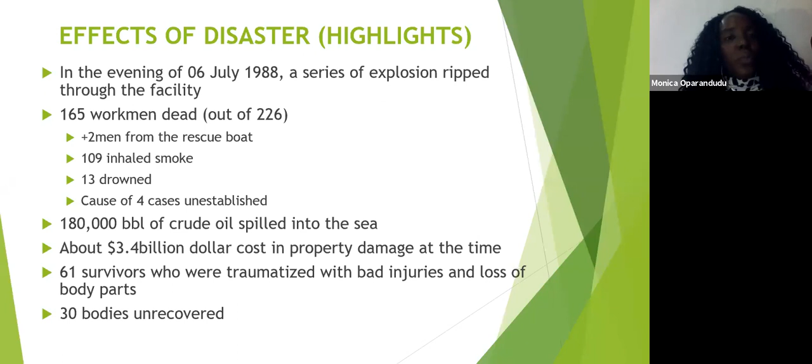Piper was exploited in 1973, and the platform, Piper Alpha, was constructed just about 2 years after. Occidental took up operation of Piper Alpha in 1976, producing oil and exporting to one of the islands in the Orkneys called Flotta. Because of the high productivity of this operation...

Just barely 2 years after production began, the platform requested from the UK government an exception to encroach further. This request was granted on one condition: rather than continue to flare, which was the practice, they would have to export gas.

In response to this condition, Occidental had to get Piper Alpha retrofitted to accommodate a gas treatment facility as well as a condensate handling facility. They principally exported propane and methane gases while injecting the condensate into the produced oil line for export.

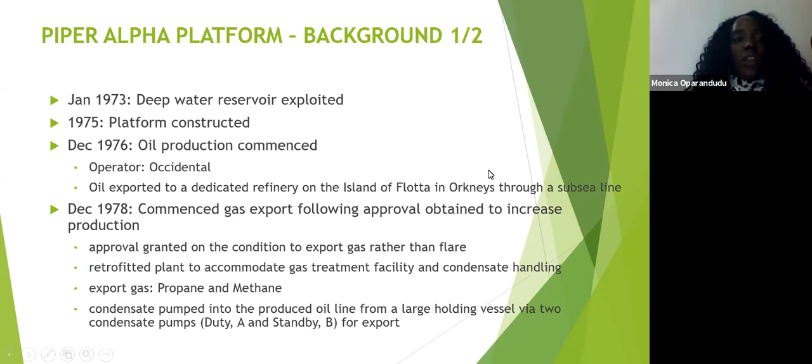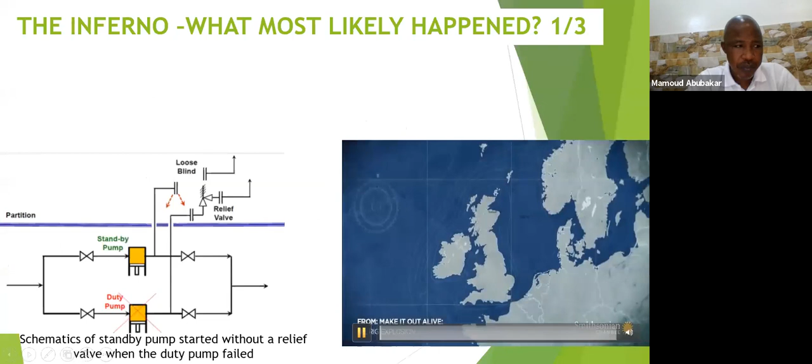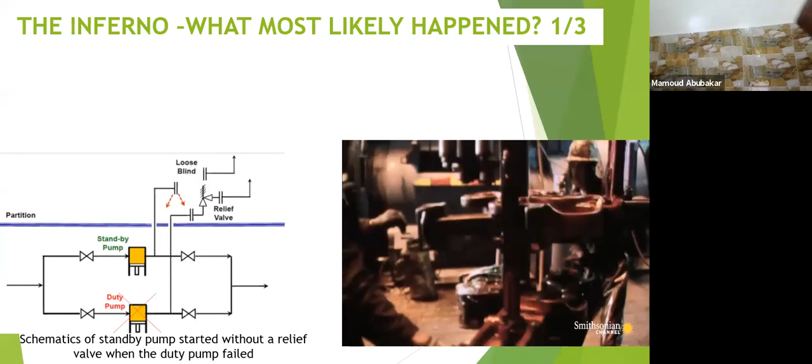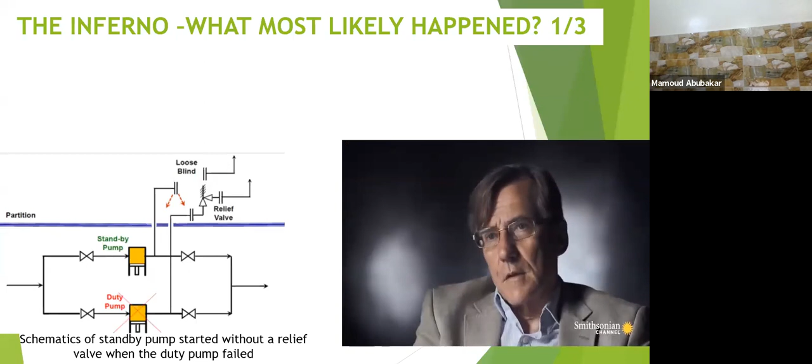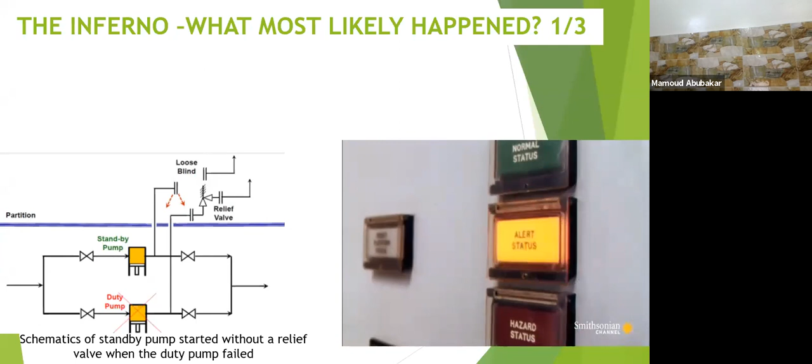July 6, 1988. 120 miles northeast of Scotland: the Piper Alpha oil rig. At 14,000 tons and 2.5 times the height of the Statue of Liberty, it is one of the largest rigs in the world. Piper Alpha was the world's most successful oil rig, meaning that in a single day it produced more barrels of oil than any other rig or platform. A crew of 226 rotated shifts to keep oil and gas flowing. Geoff Bollands is the chief control room operator that evening. At 9:45 p.m., Geoff suddenly hears an alarm indicating a problem with one of the rig's condensate pumps. Condensate injection pumps tripped more than any other equipment they had; there was no panic, they knew they needed to get it back on because it was going to start affecting production. That evening, Pump A is offline for maintenance, leaving just Pump B working—the same pump now shut down by the alarm's trip system. The condensate pumps were an integral part of the production facility; you couldn't have them both offline for any great length of time without shutting down everything. To avoid a full shutdown, a decision is made to halt maintenance on Pump A and bring it back online. But what nobody knows is that Pump A has a fatal flaw: during maintenance, its safety valve has been removed, meaning there is nothing to stop thousands of cubic feet of gas escaping into the atmosphere. The faulty pump is switched back on. Then, at 9:55 p.m., disaster: a spark suddenly ignites the escaping gas, and an explosion rips through the rig.

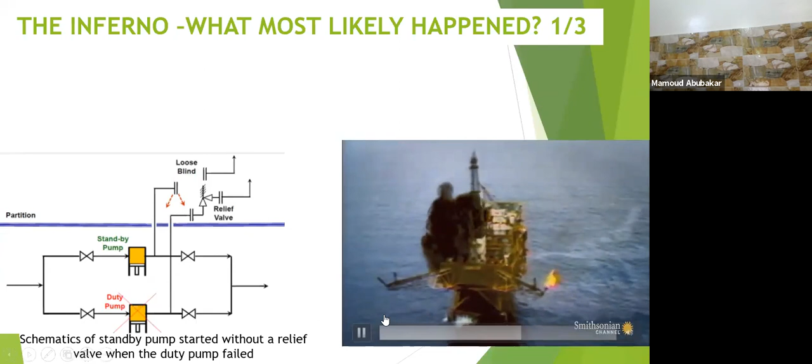Confronted by 700-degree flames, most of the 226-strong crew are now either dead or severely injured.

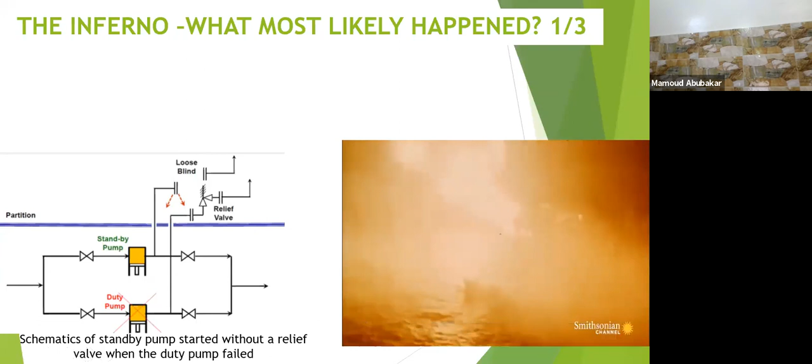The nearest analogy is that it was... Okay, so as a way of refresher, and for the benefit of people on the call who are not so familiar with the Piper Alpha story.

The release of hydrocarbon came from the flange, which was used to stop the point from which the pressure relief valve was taken off. What was said to have happened that day, from the investigation, was that after the spade had been put in between the line flange, the maintenance folk had actually tightened the bolts with their hands.

Secondly, the line also was not—and for understandable reasons—the line was actually isolated; the line was offline.

One other key thing to note about what happened that day was that, as expected, the permit to work on the standby pump was raised, separate and different from the pressure relief valve of the pump.

The issue was that the filing system at the time was such that permit to work files were put in locations where the equipment was actually stored, next to the equipment being fixed or for which they were raised. Essentially, they had a location-based filing system that warranted permits to work being kept in different locations rather than together for sets of equipment.

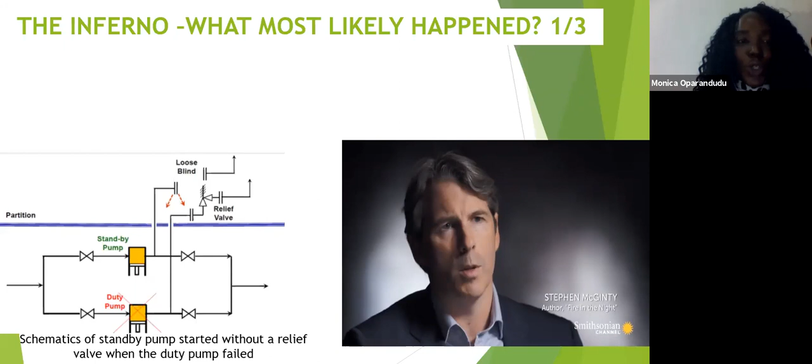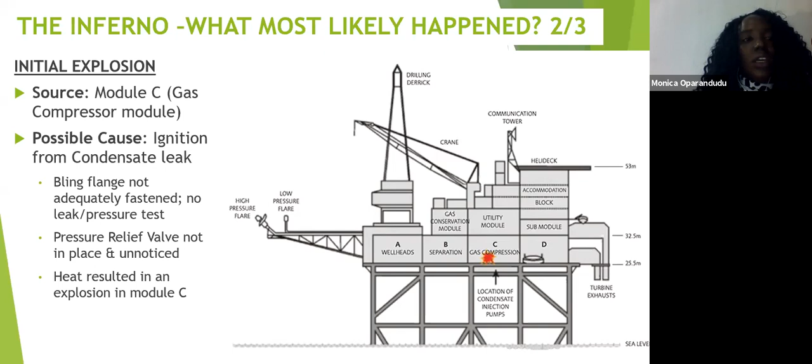The first explosion happened as a result of an ignition in module C, which is a gas compressor module. Yet another explosion followed shortly after in module B.

What was thought to have happened in this case was that after the system upgrade from oil production to accommodate gas, there was no risk assessment done to revisit the effect of gas production on the facility. The compressor module was designed to withstand only fire, not blast, so when the first explosion happened, the walls of compressor module C were shattered apart, with panels flying around.

It was thought that these flying panels would have ruptured a tank in module B, which is actually the separation platform, housing a tank farm of up to 55 tons of crude oil.

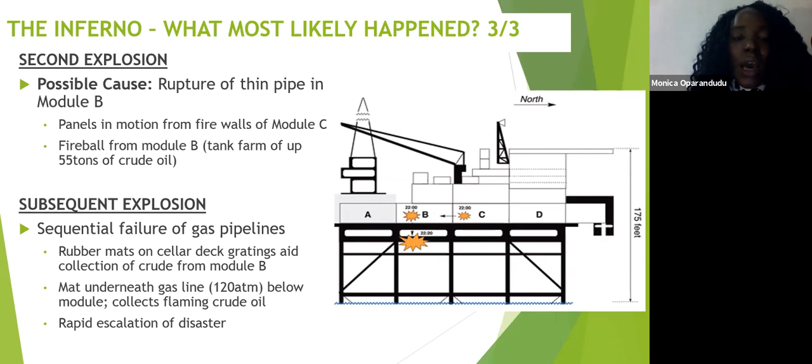After the second explosion, several other explosions followed, principally from the failure of a gas pipeline, which was pressurized up to 120 atmospheric pressure.

A couple of other findings that escalated the incident: the fire was still being fed from adjoining platforms, the Tartan and Claymore. This was principally because the management of those platforms were insistent on waiting for feedback on the severity of the incident on Piper Alpha—feedback that was never going to come, given what they were experiencing on the other end.

One other escalating factor was that in the course of about 2 hours of flame, no water was released into the fire to fight it or to cool the structures. That was a significant gap.

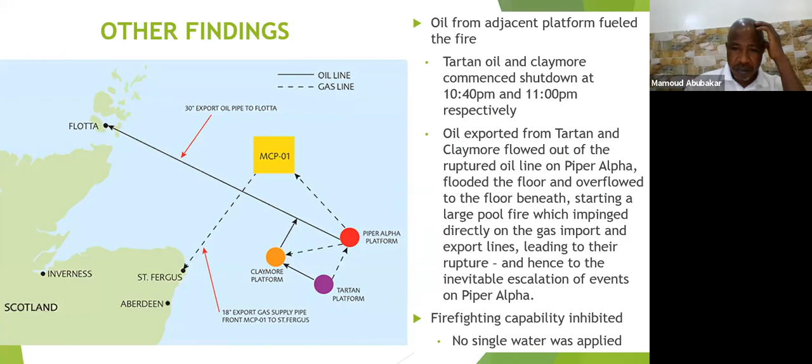Monica, you finish before we do question and discussions. Questions? Okay. All right. Okay, that's fine. We'll move right into the incident investigation, just a snapshot.

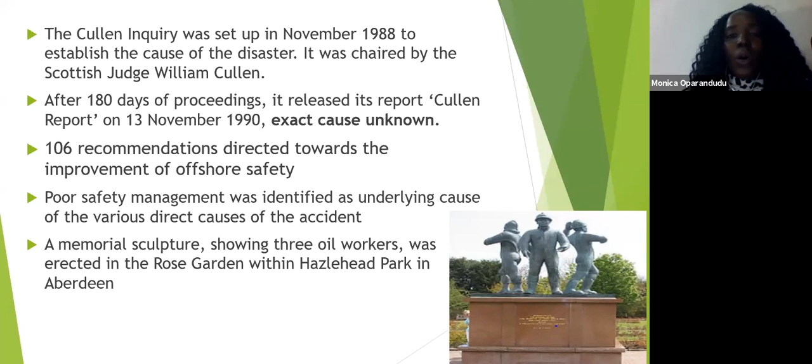After the incident, a panel of investigation was set up led by William Cullen, and it was deduced that there was no exact cause of the incident. Understandably so, because most of the evidences were lost and a lot of people who would have given live testimonies were also gone. However, piecing some information they got together, they were able to arrive at three major root causes: first being management failure, second being a gap in the MOC process, and finally, procedural failure.

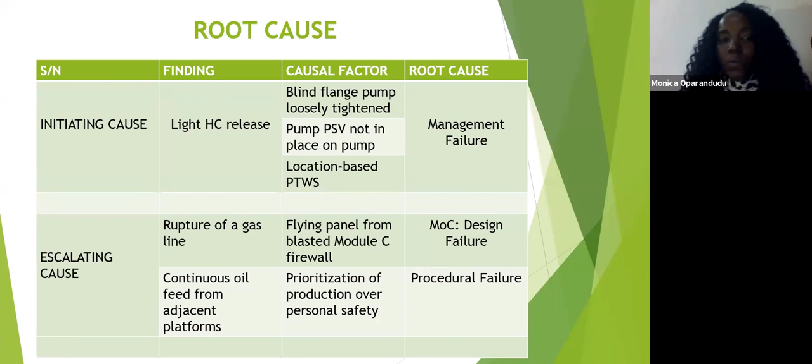As we all know, Piper Alpha, in terms of number of lives lost, had been the most fatal and traumatic event in the oil and gas industry, right? And the event left us with a lot of lessons. So right now, we'll just take a snapshot into the key lessons that were learned from the incident. One of them being that versus the

location-based work permit filing system at the time of Piper Alpha, most facilities right now operate a centralized work permit system, that allows permits to work for systems and their associated components to be filed in the same place, regardless of relative location in the design of the platform. Also, to ensure a seamless transfer of activities between shifts, most operations have also begun to adopt toolbox meetings to ensure that no detail is left untouched between shifts.

One other lesson is the need to prioritize safety over production, which was one of the gaps we saw, and to also eliminate the human influence in deciding when to back off production, when lives are being threatened, are made to factor in back pressure systems during the design of platforms.

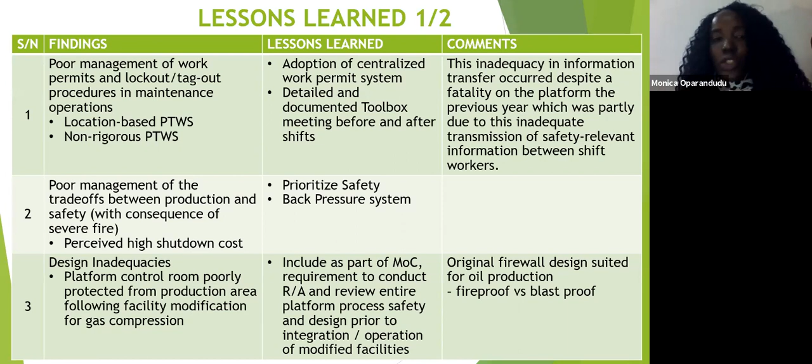Platform structures also gave way sooner than later in the course of the incident, right? Not able to carry critical components of the platform, especially the sections that housed the crew on board, the emergency room, right? So after this incident, there became a recommendation in one of the RPs that select platform structures be fire or blast proof, depending on the outcome for such platforms, and priorities are oftentimes given to manned platforms.

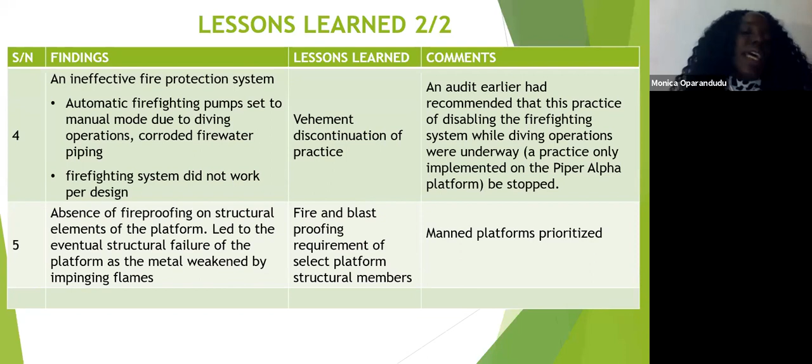Now to the legacies which Piper Alpha actually left us. The first and most important one, which was taken from the Piper Alpha incident, was the introduction of the safety case regime, which essentially is a written demonstration of evidence and due diligence provided by operators in order to demonstrate that they have the ability to operate a facility safely and can control inherent hazards.

To drive this safety case regime in the UK at the time, regulations were made to ensure that the safety case regime is enforced. And such regulations transferred the responsibility for identification of major accident risk from the legislator and safety inspectorate to the operating company. And it also stipulated that operators must also prove that they have consulted with the workforce.

In this case, the people who are exposed to the risk, right? So they would have consulted with them to prepare such safety cases, and have made copies of the accepted document available to them. And then this safety case also was supposed to be reviewed and updated periodically by the operators.

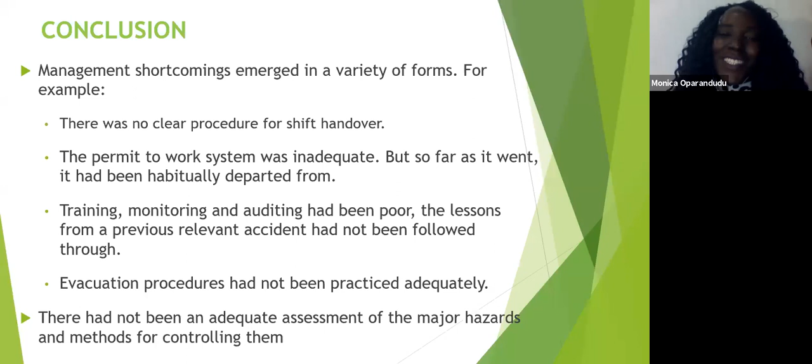And also as corporate bodies, it's good to know that we have folk from the assessment body joining us, and like personal safety, health, safety, and environment is everyone's responsibility. I am committed to safe operation and safety wherever I go and find myself. And the question I'm going to ask to everyone on this, thank you.

Thank you very much, Monica, for the beautiful and highly educative presentation. Before I hand over back to you, our elder for today, Engineer Bayo, I would like us to take note that this presentation wouldn't have come at a better time than the situation we find ourselves in with respect to process safety in Nigeria today.

We are aware of the recent tanker explosions within the same week, one in Lagos, another one in Lokoja, claiming over 50 lives. And these are coming on the heels of another explosion that happened a few months ago on an offshore oil platform off the coast of Ondo State. And you see these incidents that happened 32 years ago have similarity with what is happening today. So what we should focus on discussing today is to look at those recommendations that were made after these incidents, because you learn from incidents and take actions to prevent further occurrences.

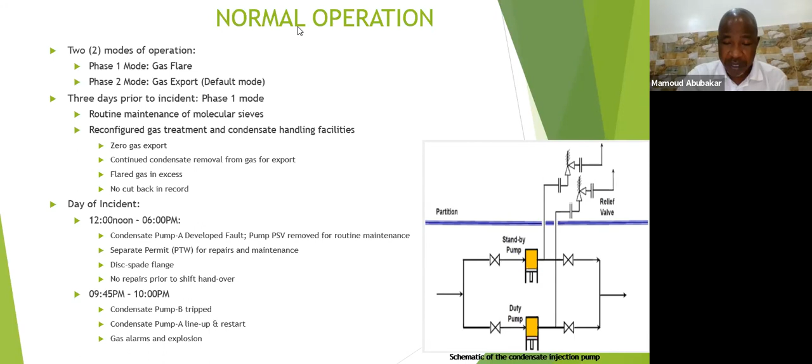So whether our situation is still the same as the situation where the UK was before this disaster, or we've moved away and some of those recommendations have been implemented. We need to discuss this today and see if there's anything we can take away from this to improve our own system. Thank you very much once again, Monica, for this wonderful presentation. Mr. President's Representative, Engineer Bayo Olarewaja Alo, please, you take the first shot.

Okay, thank you very much, Engineer Mamoud, for putting this together, and Engineer Monica, congratulations on your very clear and interesting presentation on the Piper Alpha disaster, which happened some 32 years ago. And personally, listening to you, I know that there are a lot of parallels for us here in Nigeria.

When the Piper Alpha thing happened, I was very active in the industry at the time and working for a multinational company, Shell, and many other IOCs took seriously the recommendations coming out of Lord Cullen's report and ensured that they were implemented in facilities. I can say that Shell in Nigeria did that, and I'm sure that most of these other IOCs probably did the same. The problem is, what have we done in our own local operators? I'm talking about the marginal field operators. I'm talking of NNPC refineries and the NNPC pipeline system. Every now and then, we have this mini Piper Alpha happening on the NNPC pipeline.

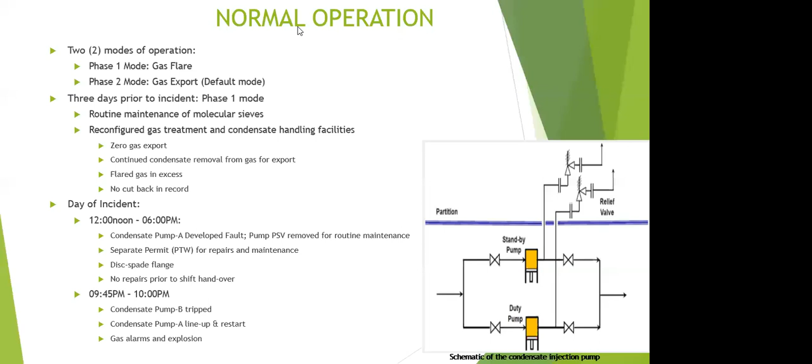Some due to failure of the aging facility, but a lot due to sabotage from people who want to steal the products. But what I find very, very distressing personally is the fact that after each incident, I don't see a published report that has looked at the incident, carried out proper investigation, knows what the failures are, what are the management failures, what are the technical failures, what are the operators' failures, and then put measures in place to address them so that we don't keep killing people around.

For me, that is an aspect that I think we should focus on. How do we ensure that those who are responsible in Nigeria perform their roles and come out with recommendations that will help us to prevent such occurrences again? If we don't do that, we will continue to kill innocent people and continue to destroy our environment. Thank you.

Thank you very much, sir. I think we also need to yield the floor to Professor Adefila before we throw it open.

Thank you very much, Engineer Mamoud. If I can go back a little bit, we really have to appreciate you for this wonderful job which you took on, and it has yielded a lot of good results. I'm sure for me, I eat better now at home. I'm sure many of us do also from the previous lecture. This lecture has come at a wonderful time.

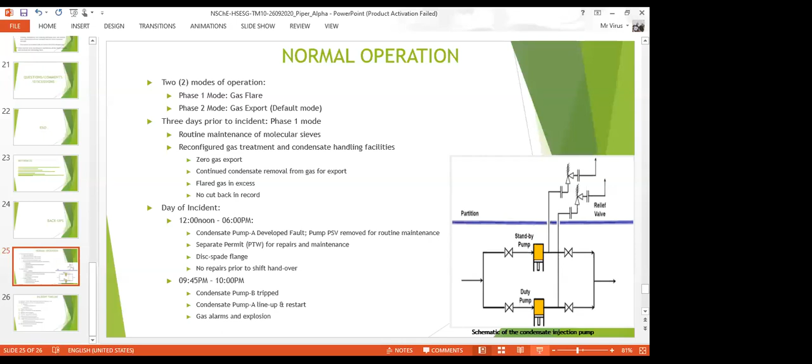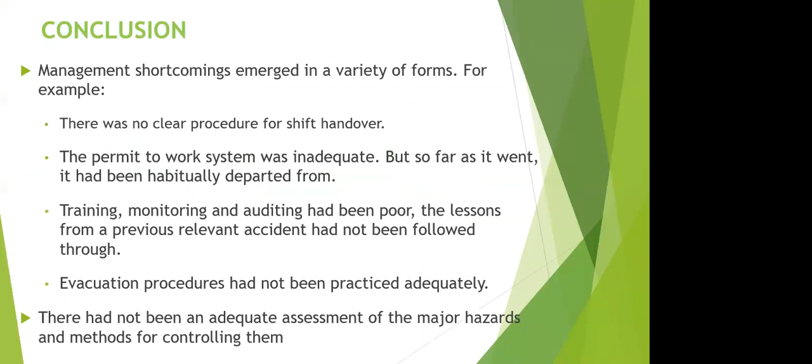Then, at a particular point, though I couldn't catch it very well, the areas which DPR has also taken note of, I want her to wind back a little bit so that you could see, because it seems as if DPR was suggesting that a small section in the DPR be... We can do that later. Where you drew attention to DPR. Anyway, when question time comes, we'll take it on.

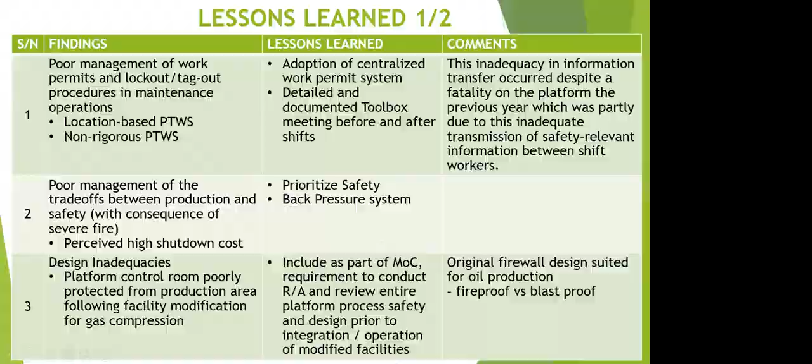And I want Mahmoud's committee to recommend to council to see what we can do in escalating some of these lectures to our journal or to any other place where it can become more visible. Thank you very much, Engineer Mamoud and his team. Thank you.

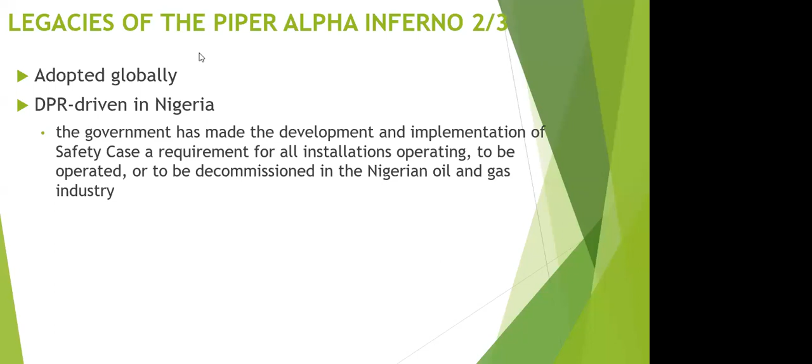Where exactly are we? Because in Nigeria, I know that we specialize more on occupational safety rather than process safety. I want to know what's the position of DPR on either enacting or ensuring that process safety becomes as prominent as occupational health and safety, the way we have it in Nigeria. And secondly, since this is a professional body, I would like to know if we have a professional stand on

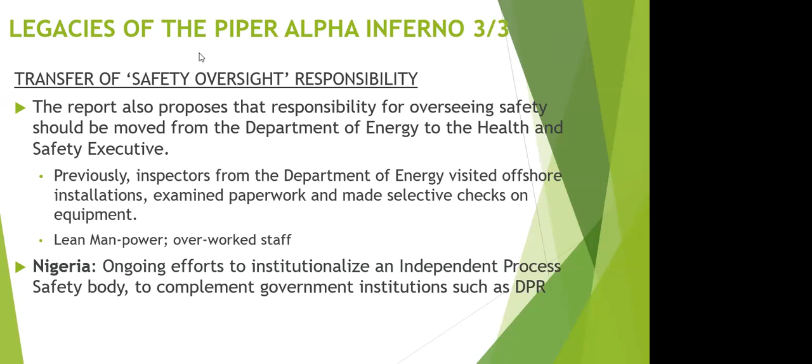Thank you very much, Engineer Bright. The two key issues that you raised: that presently we put more emphasis on occupational safety and neglect process safety is very true. And also you ask what NSChE is doing in terms of how to entrench process safety. Dr. Irene is not here, and I think I need to speak a little bit on that.

The Nigerian Society of Chemical Engineers is presently promoting the process safety initiative called the Process Safety Initiative of Nigeria. Those that are familiar with AIChE's CCPS, the Center for Chemical Process Safety, or the European Process Safety Centre: this initiative in Nigeria is modeled around that. The organization has been registered with the Corporate Affairs Commission now.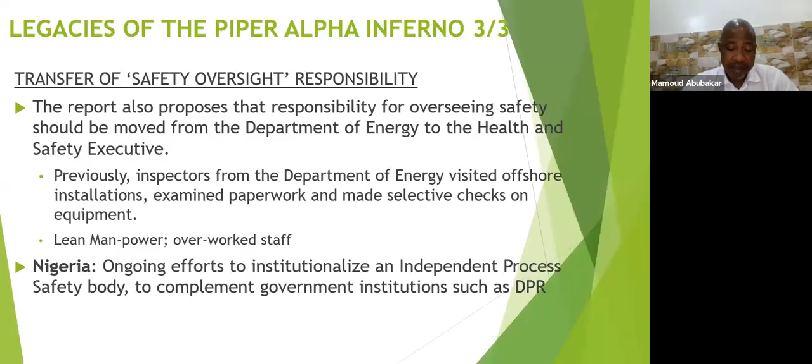It is going to be an independent body. Membership is based on corporate bodies. Any corporate body can be a member, and it is privately driven, an organization recognized by Corporate Affairs Commission as it is now. So the main focus is to develop capacity in process safety, and also provide support in terms of investigation, standards, codes, and improving process safety practices.

So in that case, we are actually on the way. The Board of Trustees just met two days ago. We also have an implementation committee, and we are moving.

So I don't know, is there anybody from DPR here to maybe talk about, or somebody knowledgeable about the DPR process to speak about that particular issue with respect to whether DPR actually have a process safety unit.

Engineer Dadet, I know you work closely with DPR with respect to your position in your organization. Well, I think I wouldn't want to comment on this, because it would have been more appropriate for someone in DPR to comment on this. But the only thing I can say is that yes, we have some aspects of our process safety features that DPR is involved in. For instance, there are situations where if we want to do HAZOPs, we get DPR also involved in some of our major HAZOPs.